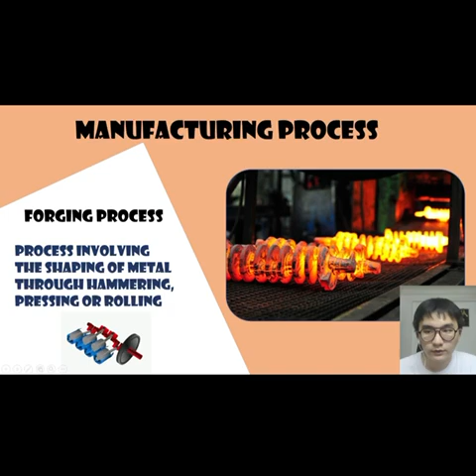Next is casting. It involves using a mold, which will be used to form the crankshaft during casting. The mold is typically made of sand or another refractory material that can withstand the high temperature involved in the casting process. Tanishwari will explain more in detail about the manufacturing process in upcoming slides.

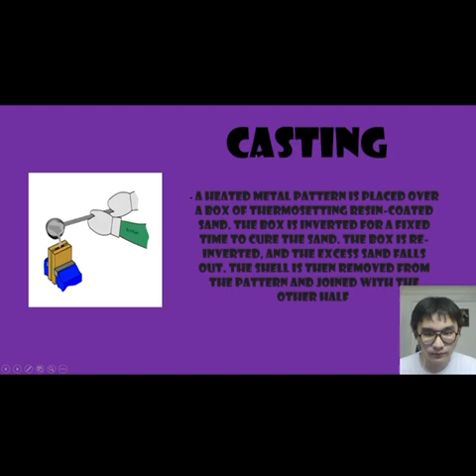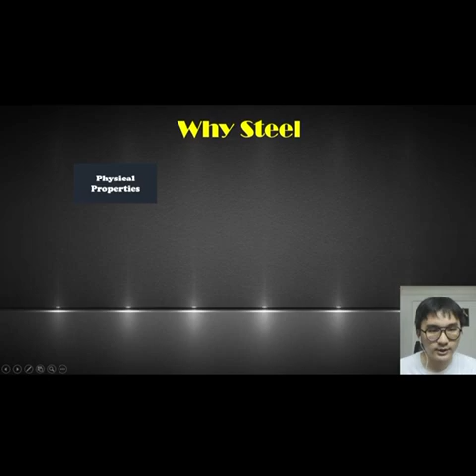Allow me to explain why steel and forged iron are suitable for crankshaft based on the physical and mechanical properties. Steel offers high tensile strength, making it capable of withstanding the significant force and stresses experienced by crankshaft during engine operation. Steel can be heat-treated to achieve the desired hardness, ensuring the crankshaft can withstand wear and deformation over time.

High wear resistance is an essential property for materials used in making crankshafts due to the nature of their function within an engine. The crankshaft is subjected to continuous rotational motion and cyclic loading, which leads to frictional wear at contact points with other engine components, such as bearings and connecting rods.

For mechanical properties, steel used in crankshaft typically exhibits high tensile strength to withstand the force experienced during engine operation. It's essential for steel used in crankshaft to have a high yield strength to resist permanent deformation. Hardness is the resistance of a material to deformation, indentation, or penetration. For crankshaft, high hardness is desirable to resist wear and deformation at contact points with other engine components.

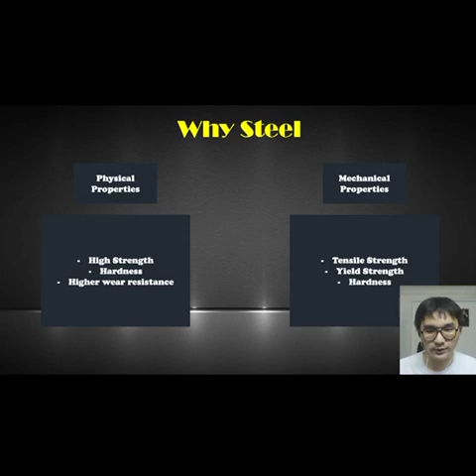Next is the physical properties and mechanical properties of forged iron. For physical properties, the melting point of iron is approximately 1538 degrees. Forged iron typically has a dark gray color. Iron is ferromagnetic, meaning it can be magnetized.

For the mechanical properties, forged iron exhibits high strength, making it suitable for withstanding the high stresses and loads experienced by crankshaft during engine operation. Iron has good toughness, meaning it can absorb energy without fracturing. This property is important for components like crankshaft, which experience cyclic loading, while iron is susceptible to corrosion. Forged iron components can be coated or treated to enhance their corrosion resistance, depending on the specific application requirements.

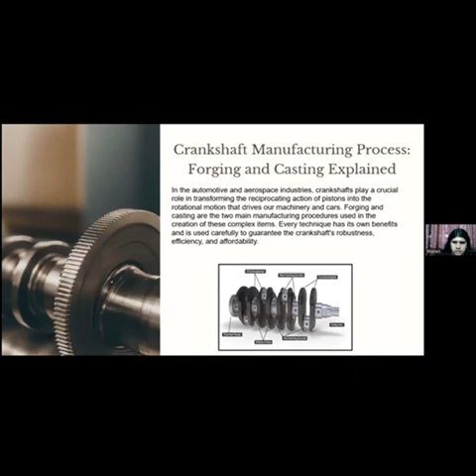Okay. So for the manufacturing process, there are two processes, which are forging and casting. Before that, I want to brief a bit on crankshaft. In the automotive and aerospace industry, crankshafts play a crucial role in transforming the reciprocating action of pistons into the rotational motion that drives our machinery and cars. Forging and casting are the two main manufacturing procedures used in the creation of these complex items.

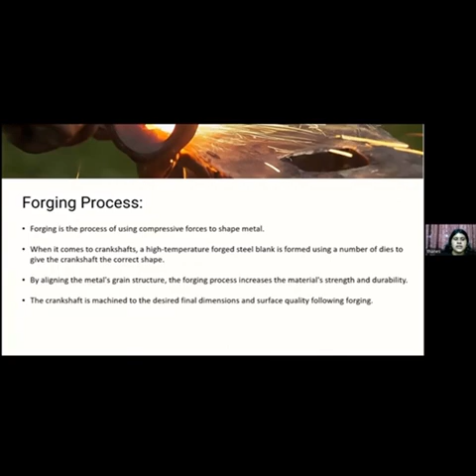Forging process is the process of using compressive forces to shape metal. When it comes to crankshaft, a high-temperature forged steel blank is formed using a number of dies to give the crankshaft the correct shape. The next one is casting process. In the casting process, metal is poured into a mold to generate the desired shape. When it comes to crankshaft, the shape is created using a metal die or sand mold. The crankshaft shape is formed by pouring molten metal into a mold and letting it cool and harden.

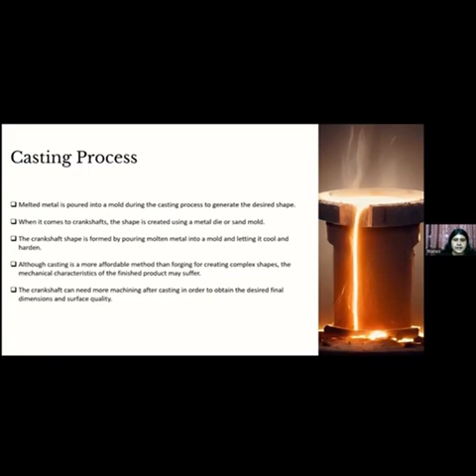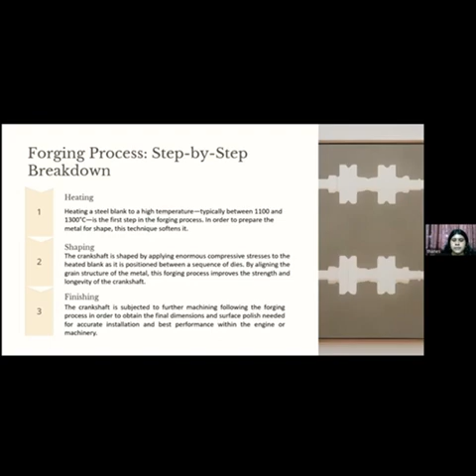Shaping. Crankshaft is shaped by applying enormous compressive stresses to the heated blank as it is positioned between a sequence of dies. The third one is finishing. The crankshaft is subjected to further machining following the forging process in order to obtain the final dimensions and surface polish needed for accurate installation and best performance within the engine or machine.

This is the casting process. There are 3 steps for casting process. Number 1 is mold preparation. In order to accurately capture the complex geometry of the crankshaft, a mold made of either metal or sand must first be carefully designed and created. The second one is pouring and cooling. The prepared mold is filled with carefully poured molten metal, usually steel or iron. Cooling and solidifying, the metal becomes the precise shape of the mold.

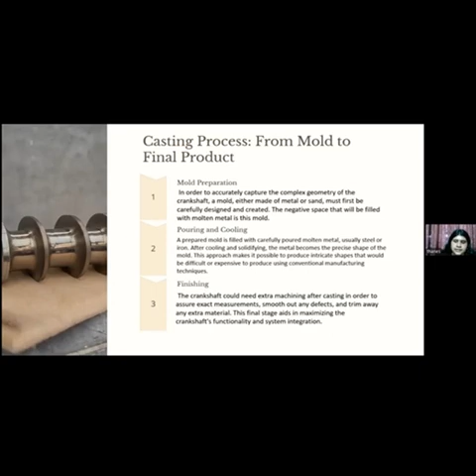The third one is finishing. Crankshaft could need extra machining after casting in order to assure exact measurements, smooth out any defects, and trim away any extra material. So these are the functions of casting and forging, and there are steps for forging and casting with explanations.

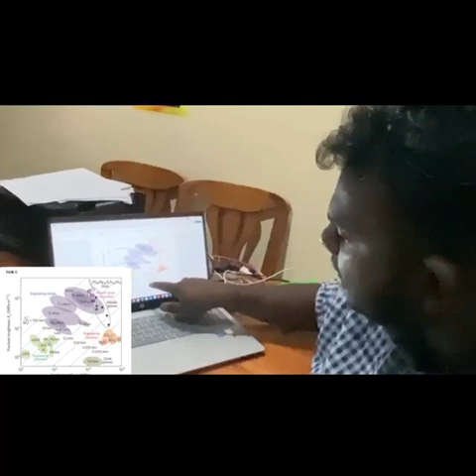Hi everyone, I will talk about the possible costing. Our case is forging iron versus casting alloy steel. The case study will be based on a 1.6 liter 4-cylinder engine's crankshaft. Crankshaft weight is assumed at 26 kilograms. Cost of iron per kilogram is 6 Malaysian ringgit. Cost of alloy steel per kilogram is 5 Malaysian ringgit.

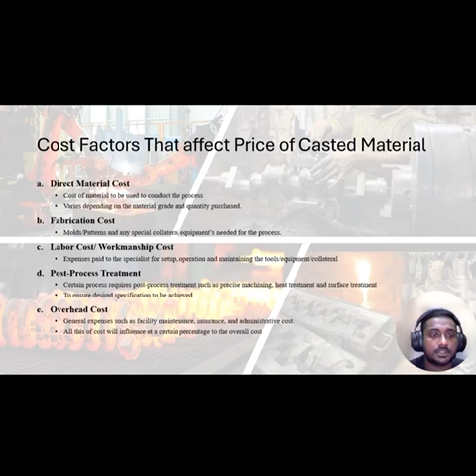So these are the cost factors that affect the price: direct material cost, fabrication cost, labor or workmanship cost, post-process treatment cost, and overhead cost. Our first case, forging iron crankshaft. To get the direct material cost, we need to find the gross weight, which equals initial material weight plus material loss in process.

To calculate initial material weight, we need the target mass over forging yield. The common range for forging yield is about 70 to 90%, and we use the average, which is 80%. So the initial material weight is target mass 26 kilograms over forging yield 80%, and we have a value of 32.5 kilograms. The material loss is considered in three situations: low end estimate, high end estimate, and average estimation. We choose the average estimation, which is about 20% material loss and average forging yield at 80%. So we get a final value for material loss of 6.5.

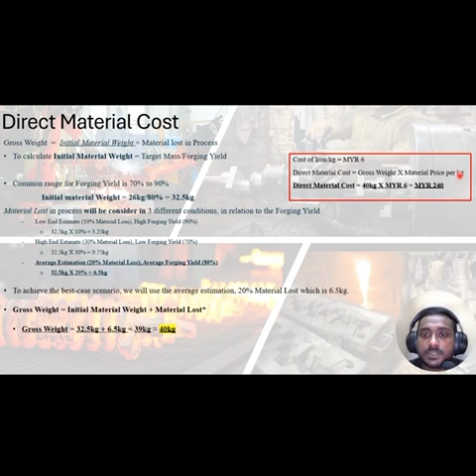To get the final, we sum up the initial material weight and the average material loss estimation, which is 40 kilograms, and we multiply that value with the material price per kilogram, which leaves us at a direct material cost of 240 Malaysian ringgit.

To estimate forging die fabrication costs, we take an internet reference for the forging die, which is about 3,000 to 5,000. We take the average at 4,000 Malaysian ringgit, multiply by the estimated average value between 10 to 15%, and add this value to the overall cost. We get a die cost of about 500 Malaysian ringgit.

For labor cost, we take the total process time per piece and multiply it with the labor rate per hour. The time taken is the sum of time to forge one crankshaft and for post treatment, which is about 8 hours and 48. We add the values up and multiply with the labor rate per hour. This value is based on internet reference, so we get a labor cost of 1,300 Malaysian ringgit.

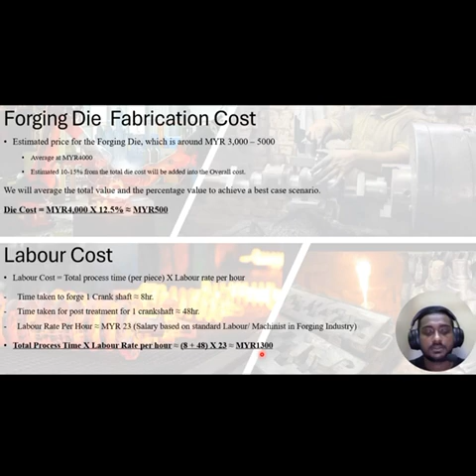For post-forging treatment costs, we choose the main processes, surface and heat treatment, at 16 to 40 per kilogram. The average value is taken at 28 multiplied by the target mass, which leaves us about 728. Machining is calculated per piece, so we get an average value of 190 Malaysian ringgit. Ultrasonic cleaning is a very precise operation, and we use the high-end estimation since a crankshaft needs to be very precisely manufactured, so we take a value of 400.

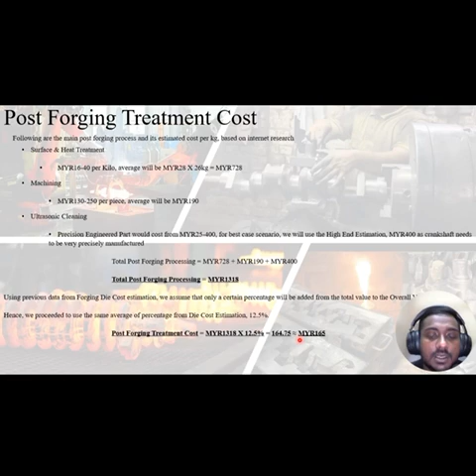So the total process will be about 1,318, and we use the same allocation as the die cost, 12.5%, and we get an allocation of 165 Malaysian ringgit. The overhead cost comprises utilities and facility rent. Utilities are electricity based on TNB data, which we estimate at 600 ringgit, and the water rate at 403.

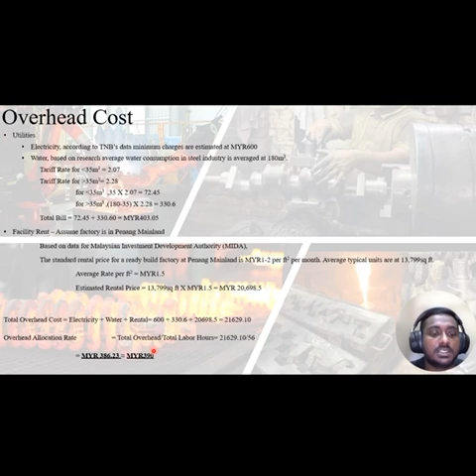Our second case, casting steel crankshaft. For the direct material cost, we assume the same gross weight as scenario 1, multiplied by 5 ringgit for the cost of alloy per kilogram. We have 200 for direct material cost. For the casting mold, we have 40 to 80 per kilogram. As an average, we take 60 Malaysian ringgit, and for the allocation, we choose 12.5% of the molding cost to be added into total costing. So we multiply the average value by the target mass and the allocation. We estimate the mold cost at about 195 Malaysian ringgit.

The labor cost is the same as scenario 1, except for the molding cool down period and the process treatment. Time taken for one crankshaft is 4 hours. Time taken to cool down each material is about 24, not included in labor cost but included in process time. Time taken for post treatment is 48 hours. The labor rate is 30. So we get a final labor cost of 1,560.

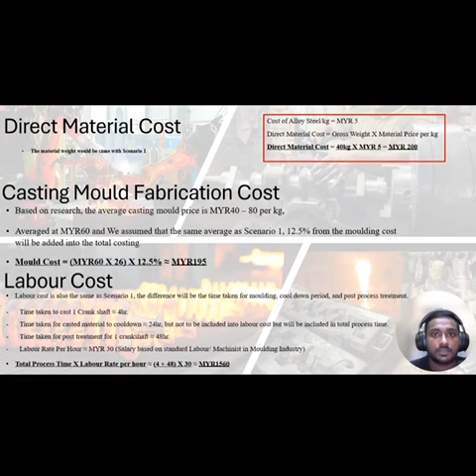For post-cast treatment, we choose the main processes such as surface heat treatment, which is about 390 per piece. Non-destructive testing takes 4 Malaysian ringgit per unit, and surface coating, a spray paint process for final heat resistance and anti-rust, is about 35 to 45 per piece. We average it at 40 ringgit. So the total will be 434 Malaysian ringgit, and we apply a 12.5% allocation to this post-cast treatment, which is about 55 Malaysian ringgit. For the overhead cost, we assume it to be the same as scenario 1.